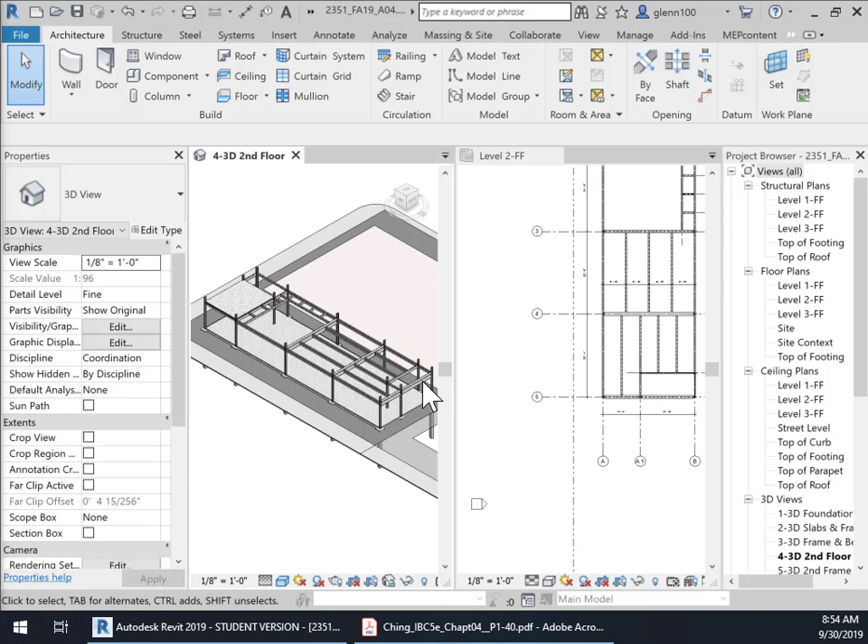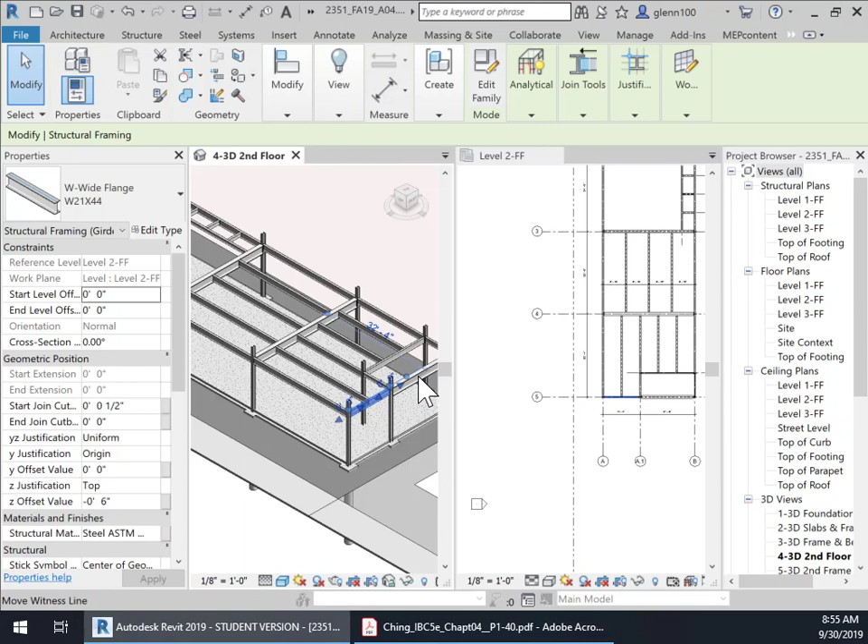In the previous video, on assignment number 4, we finished off the structure by adding beams to the girders and columns. We made some decisions about sizes and stuff. One thing I second-guessed was the size of the beam here at 27 inches—really those spans are so short we could go to like a 21 without any problem. So I probably would, and this is the advantage of having a BIM model: we can sit back and the engineer can come in and evaluate things and very easily make adjustments to the frame, whether it's just changing the size of the elements or not.

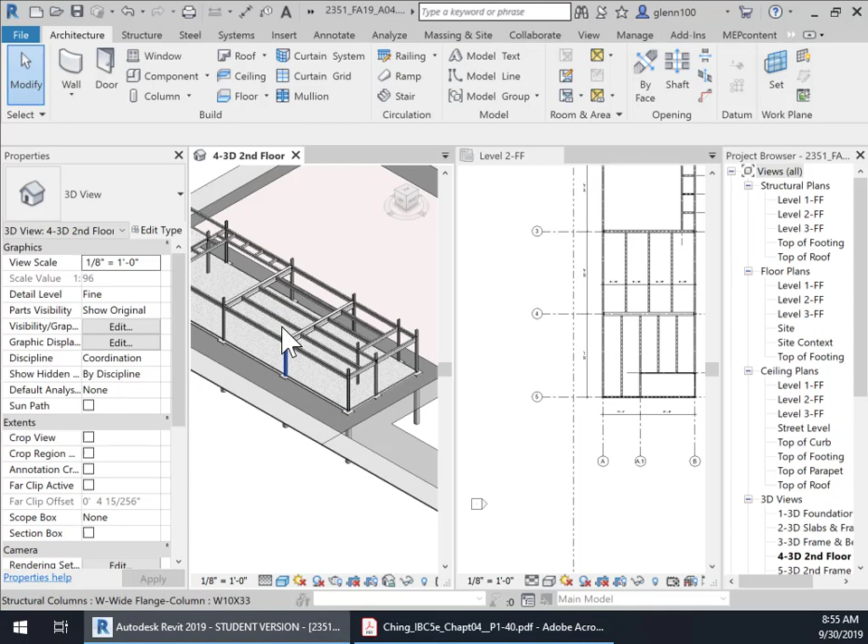But anyway, we're not going to make any more changes. Well, one more thing—I noticed there was a crossing of these two beams right here. They wouldn't do that; one has to end and then start again. Which direction would you go? Probably I would go with the beam that went from girder to girder, the long one.

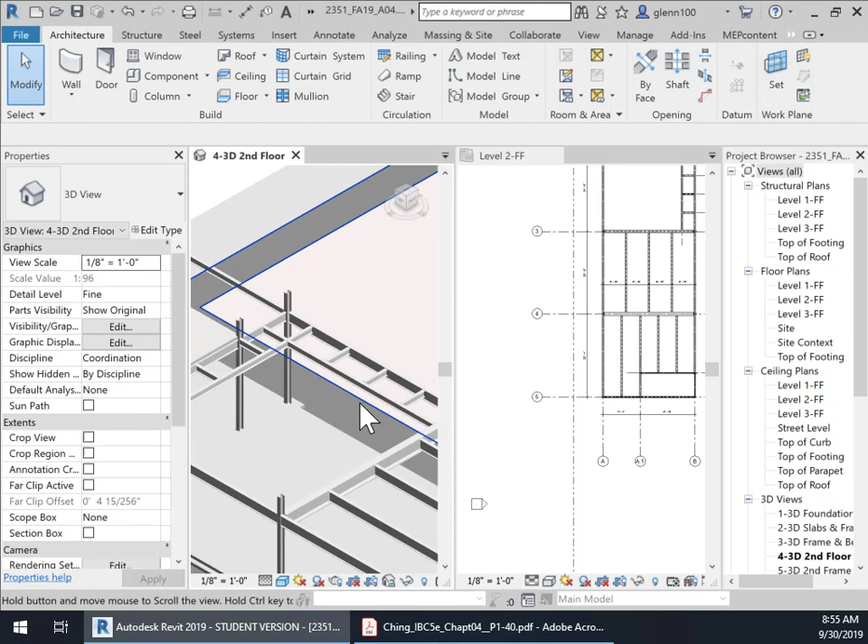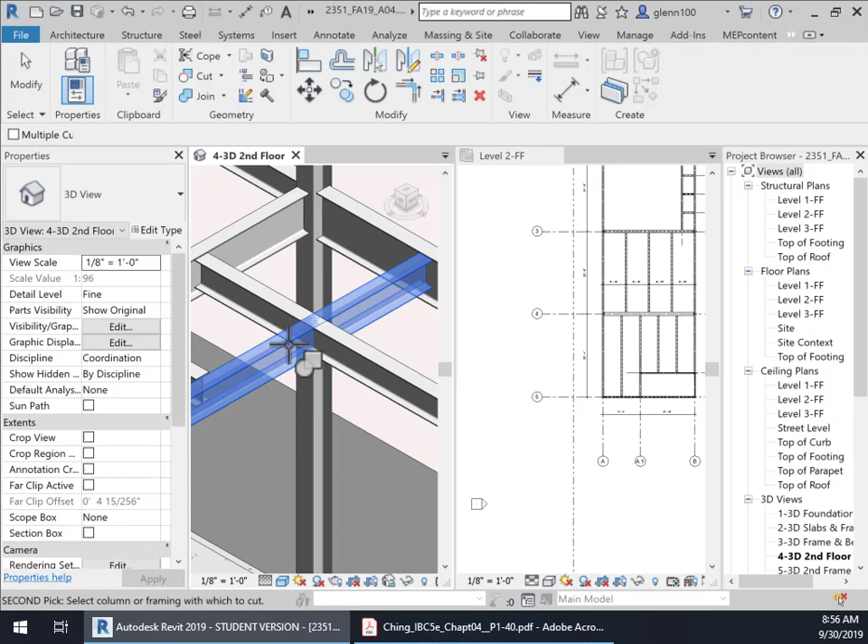And to do that, what we're going to do is use, let's see, modify—let's get the modify menu up—and then I would use coping, cope. Save the project. And then let's see if I can remember: select the one you want to cope and the one you want to keep. Yes, okay.

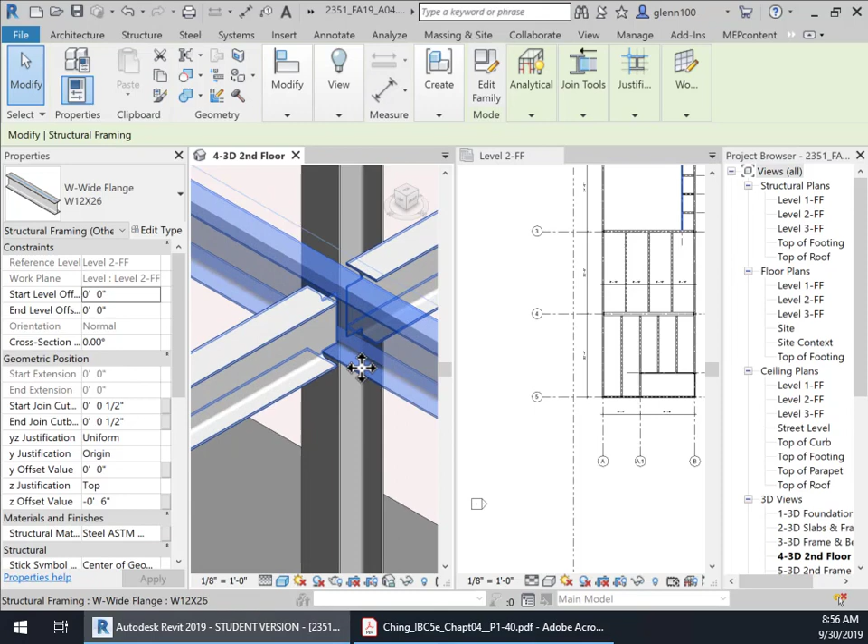So as you can see, it split them there. They should be the same length—I don't know why they're not. They should be 1226. This is 1226, so I don't understand why... oh yeah, it's coping it back. I see, okay. So these are flush, and that's what we want.

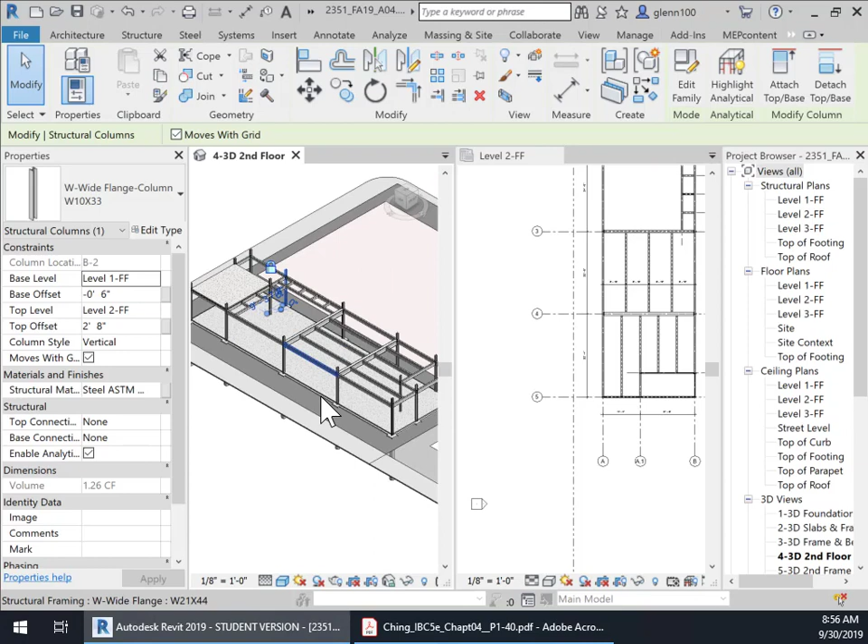They should be at 6 inches below the finished floor of the second floor, and so that's correct. Okay, so now we kind of have our frame done, and what we need to do is add the decking. In our previous work, I decked this area with a metal deck.

If we go back to Ching and my lecture, we talked about metal decking, and so we're going to use a metal decking with a concrete floor slab. There are 3 different types. Form decking, or non-composite decking as it's sometimes called, is where the metal decking is just used as formwork and isn't part of the structure, and wire mesh is added to the concrete. The concrete is really the structure here for the spanning.

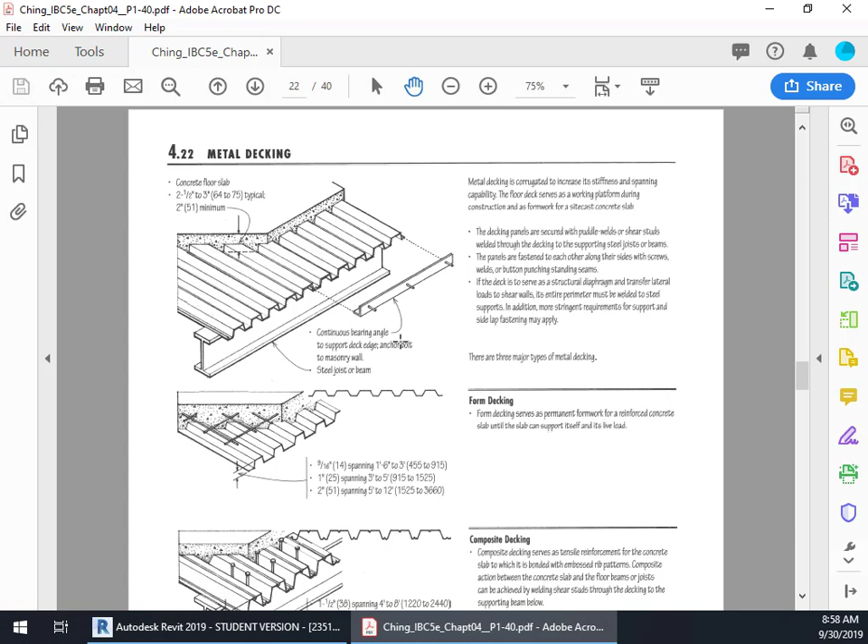And then there's what we call a cellular deck. A cellular deck has a bottom plate to it, as you can see right here, so it's covered on the bottom, creating a cell. That cell can then be used as a conduit for electrical wiring and stuff like that, rather than pulling wire through an actual conduit, because now the deck can service it. So those are the 3 types—we talked about those in the lecture. We're going to use a composite deck, okay?

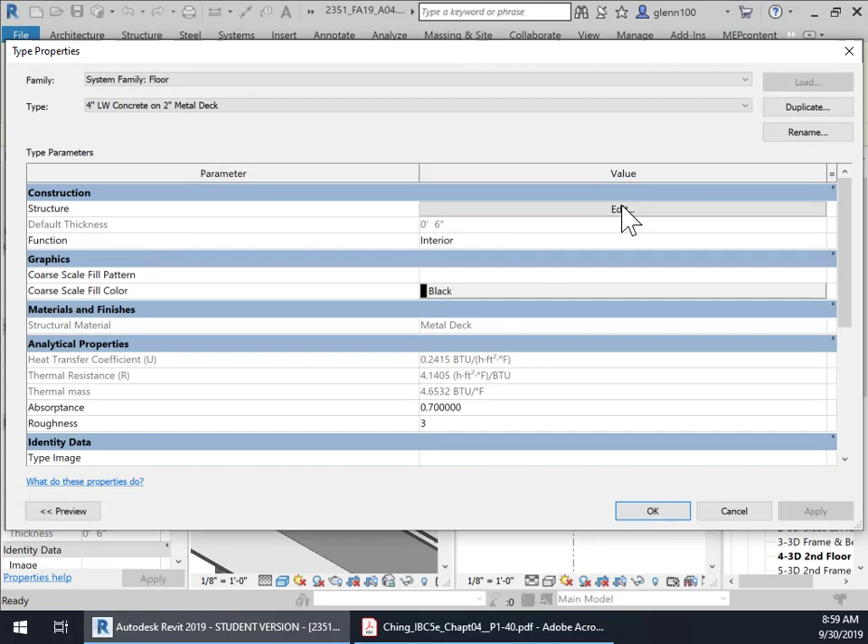And so if you look here, we have a lightweight concrete on a 2-inch metal deck, 4 inches of concrete on a 2-inch metal deck. I'm just going to take a look at this so you can see it. If we go in here and edit it, let's preview this so we can see the image. Okay, so here's our composite deck.

You'll notice if we select structural deck here—structural metal deck—in Revit you choose what that is by its profile. I chose a 2 inch by 6 inch wide: so 6 inches this way, 2 inches in depth, and composite form deck.

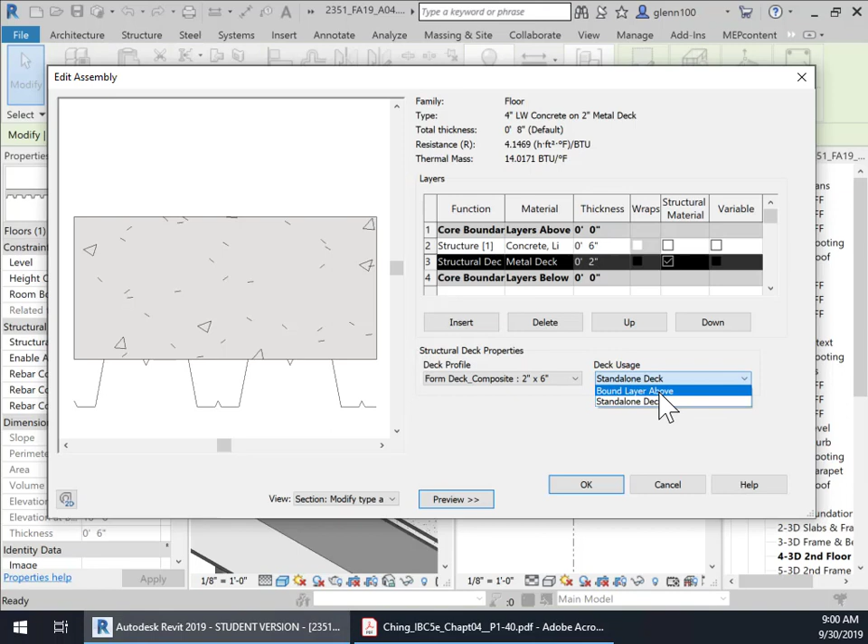If you don't have the profile you want for the decking, you'll have to go add it, and I can show you how to do that in just a few steps. Over here you have deck usage: bound layer above, or standalone deck. If you do standalone deck, the deck stands alone, not incorporated into anything else, and that's what we'll use when we do the roof.

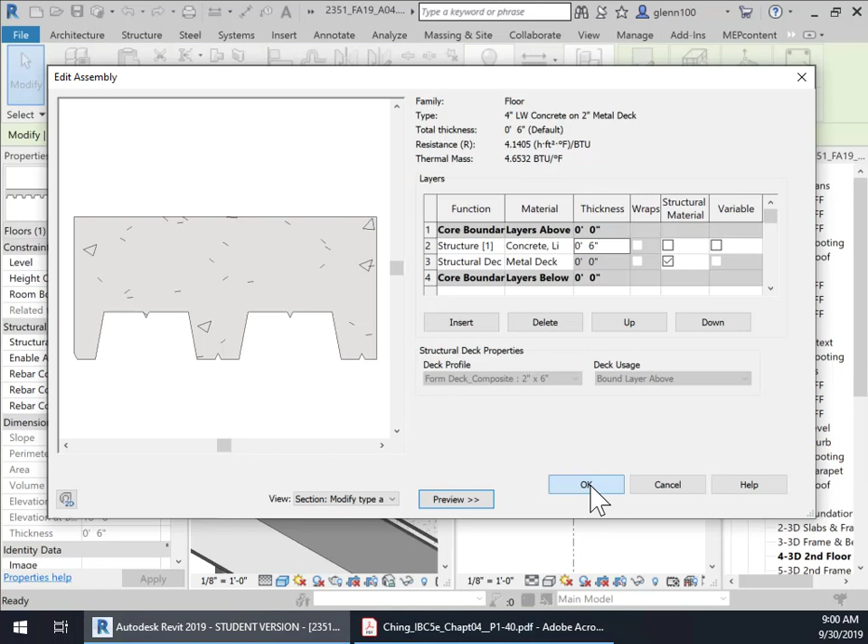So now we have our deck defined. We have 6 inches of total concrete, running from the bottom to the top—4 inches here, plus an additional 2 inches having to do with the deck. So we'll say okay to that, and okay to this.

Now, if I didn't have that profile, I mentioned we'd have to go in and add it. One way to do that is through Insert, Load a Family. Then go down to Profiles—there'll be a folder right there. You'll see metal deck profiles, form deck composite, composite dovetail.

Based on everything I know, Revit really renamed these wrong. A form deck usually refers to only a non-composite deck—that's correct for this one, form deck non-composite. If it's a metal deck and a composite deck, it's normally not referred to as a form deck, but I'm sure there are a lot of exceptions.

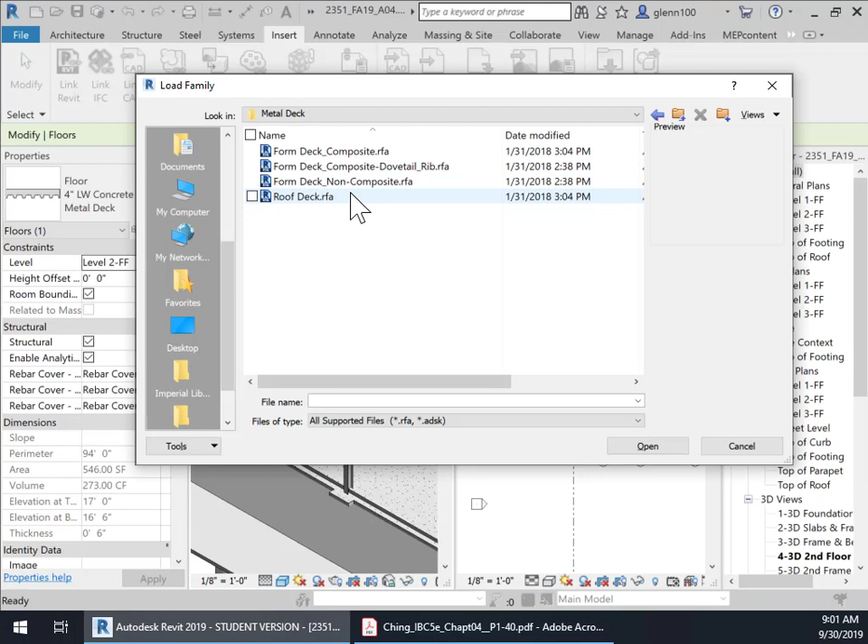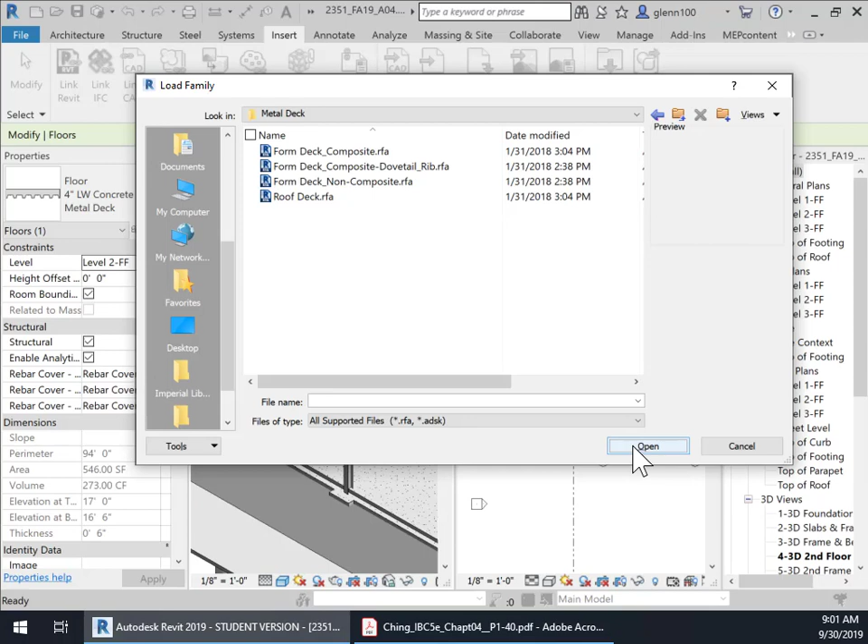And then you can see a roof deck here, which is for when we're not going to put concrete on it on a roof—so that's a quick review of metal decking and how it works. We can add these profiles, and I already added them, and we can go in and edit the type to create our own if we want, but I'm not going to open that right now.

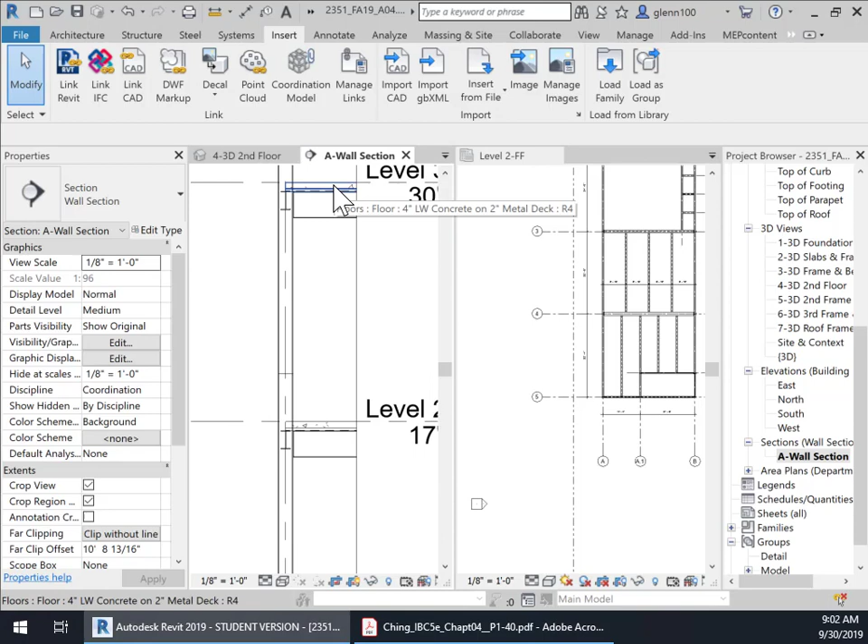So we want to metal deck this now, we're ready to do that. It's going to start at level—if we open up our wall section, we'll see the metal deck here. Actually, let's do the west elevation instead, since we don't have any walls up at this time. Let's go to the west elevation and zoom in here.

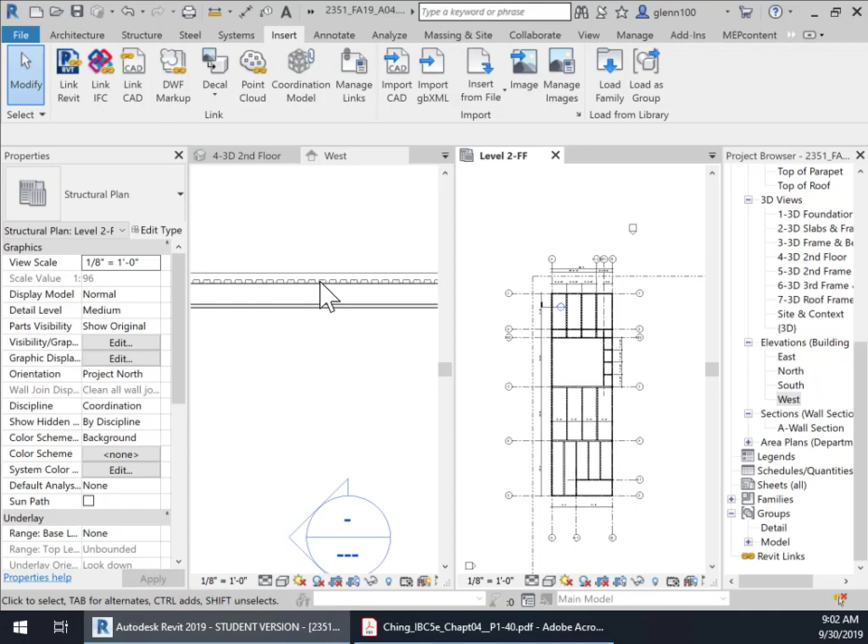In the previous part that I've already done, in this bay up here, you can see I added a deck. This deck is lightweight, on level 2—meaning the top surface is at the level 2 finished floor. That's where we want all the rest of this decking to be: at level 2 finished floor. So we'll zoom in here; we already know this part is done.

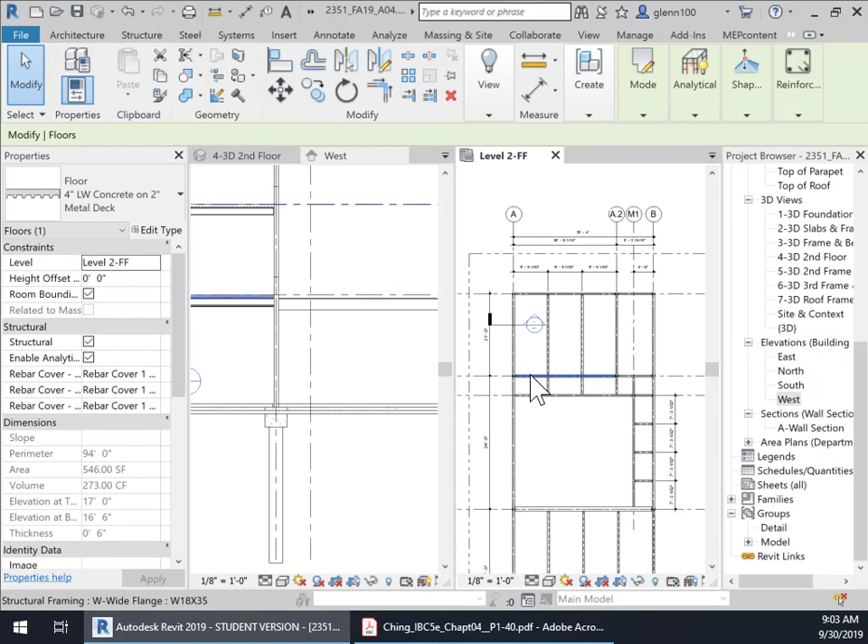I've got it hidden in that view. This is level 2 right here, level 2 structural. The way you can tell if this is structural or a floor plan is these little lines right here—that means it's showing you beams and that kind of stuff. If we open up level 2, notice the plan is blank, more or less.

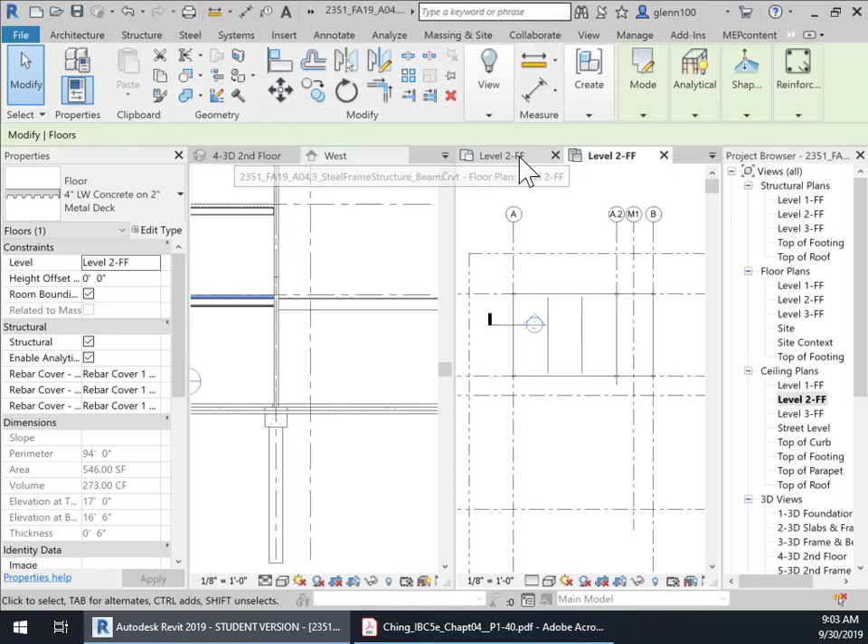And if it's a ceiling, level 2 ceiling, go ahead and open that up too—you'll see it's got a series of hash marks or grid lines. It's real subtle, but that's how you can subtly tell which view you're in. So I'm going to go back to structure because we're just going to deal with structure right now.

So let's put this in—there's a couple of ways to do it, and I'm going to do it the quick and dirty way. If you have the deck going in opposite directions, you need to make sure you have a different piece. So if the decking for this area is running in this direction, and we continue that running the same direction here and here and here, I can do that as just one slab. But if I'm going to change that direction, then I need to make changes to it.

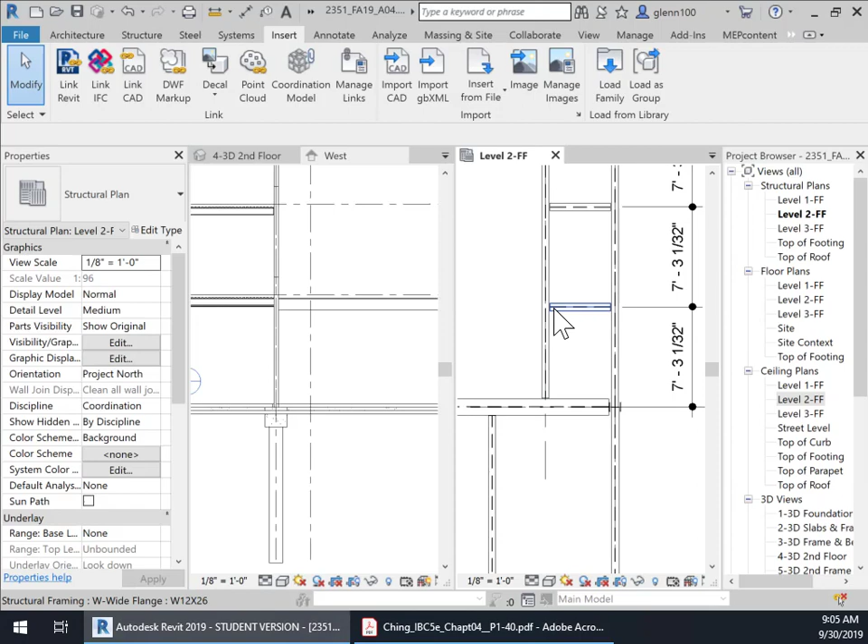Do it in separate pieces. I'm going to assume that we can run the metal decking all in that same direction. This span here is easily spannable, and these members right here really are to help support this beam, not really support the floor. The floor can be supported by this and this to keep this from torquing or from getting a moment in it. So I'm just going to cover it from one end to the other, and then we'll edit. So I'm going to go into structure.

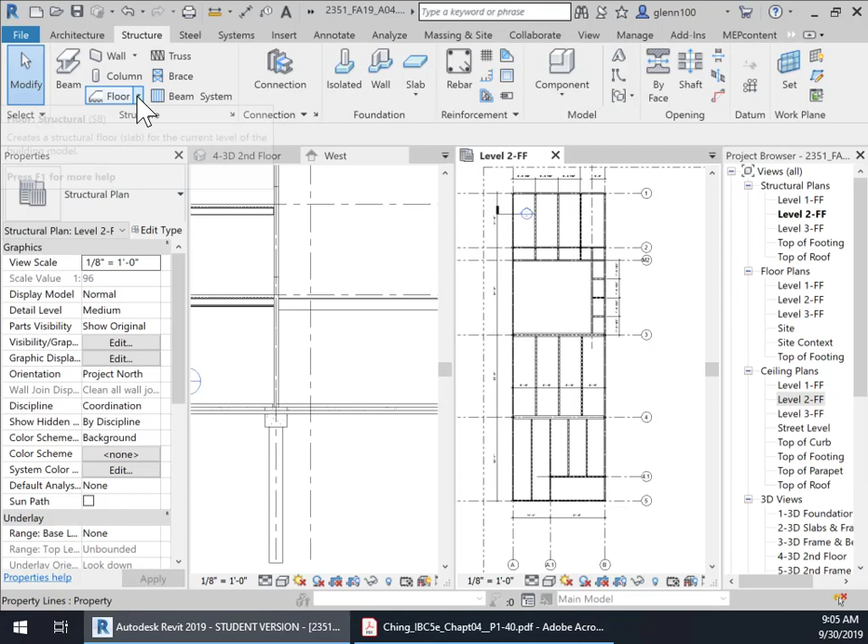I'm going to use a structural floor. And then I'm going to choose the same decking that I used before, this 4-inch concrete on a 2-inch metal deck. Okay, level 2 finished floor. That's correct. That's what I want it to do. Always check that so that you know it's going in the right measure. And then I'm going to use this, and I know it's going to go from right now from here all the way to here.

And then I've got openings that I need to put in there, but I'm going to do that in just a second. Okay, so we'll just go ahead and lock that so that it'll move with those beams if those beams happen to move. And now we have an opening right here. So this needs to have an opening. So I'm just going to choose a line right there, and I'm going to choose that line and this line, the outside edges of those two beams.

Okay, and then this line right there. And then we'll lock it to that outside edge. And then I need to trim this. I need to break this line and trim it. So I'm just going to use the trim command here and trim this one with that one. And then I need another piece, trim this with this, and trim this with this.

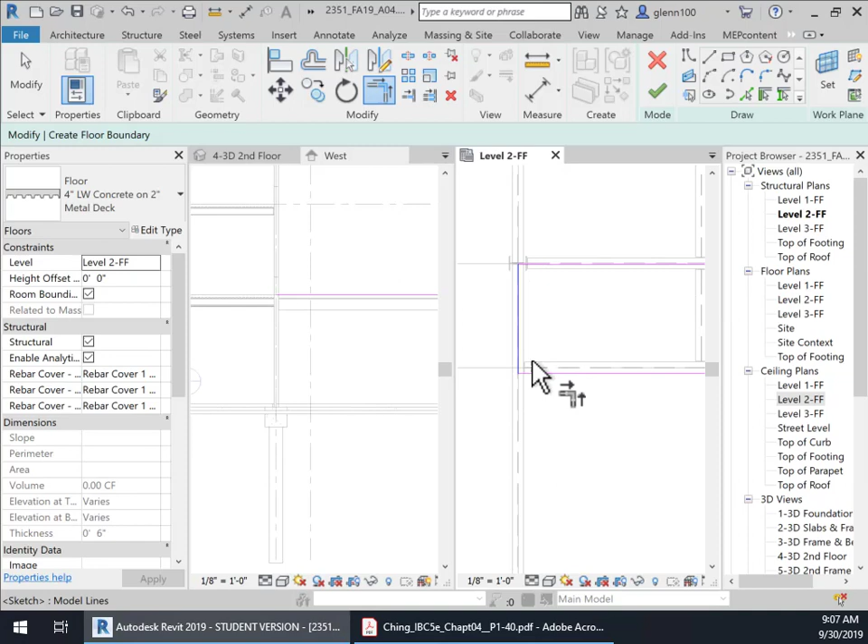Okay, and then I need another line right there. So let's put another line in. And then I need to trim those to make sure that they're closing, because these lines have to be closed. Okay, that should work. And then I'm going to come down here and do the same thing here. Okay, so I'm going to use this line, and we'll just go to this inside edge.

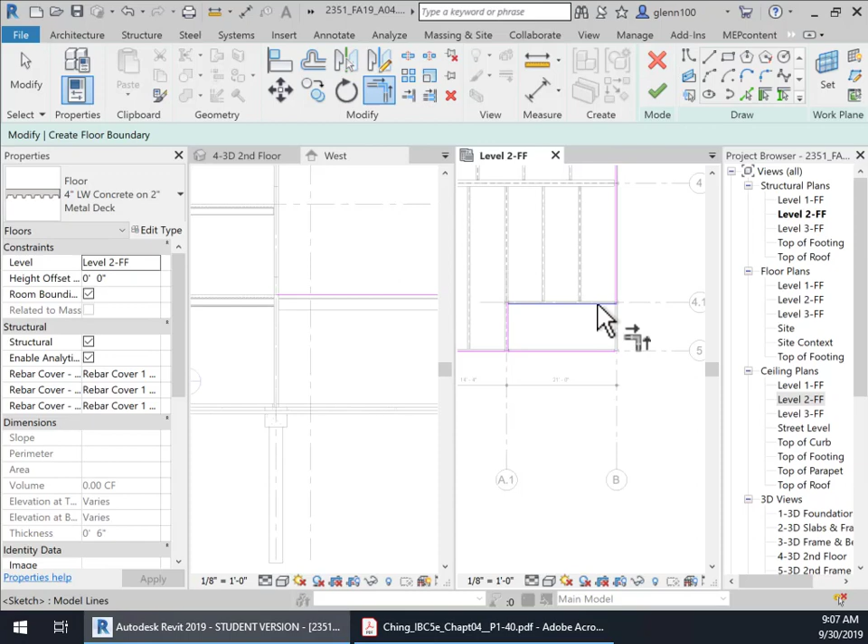And then we should be able to just trim that here, here. And I'm going to go ahead and trim this just in case they're not. So this is open because of this, it's a stairwell, and stairs need to go up and down it. And of course, this is the atrium. Now you can see right here these double lines. They tell you which way the profile is spanning. Okay, so right now the metal deck is spanning this way, and that's the way we want it.

But if we wanted to change that, if we need it spanning in the other direction, what we would do is we would come in, and you can see right up here, span direction. If I click this, then I can choose a line or draw a line. I'm just going to pick a line. So my span direction was this direction, and it was running this way, which it's not. But if it was, then I could choose that. And now the double line shows the deck is spanning this way, which is the wrong way. So I'm going to go back to here and select that.

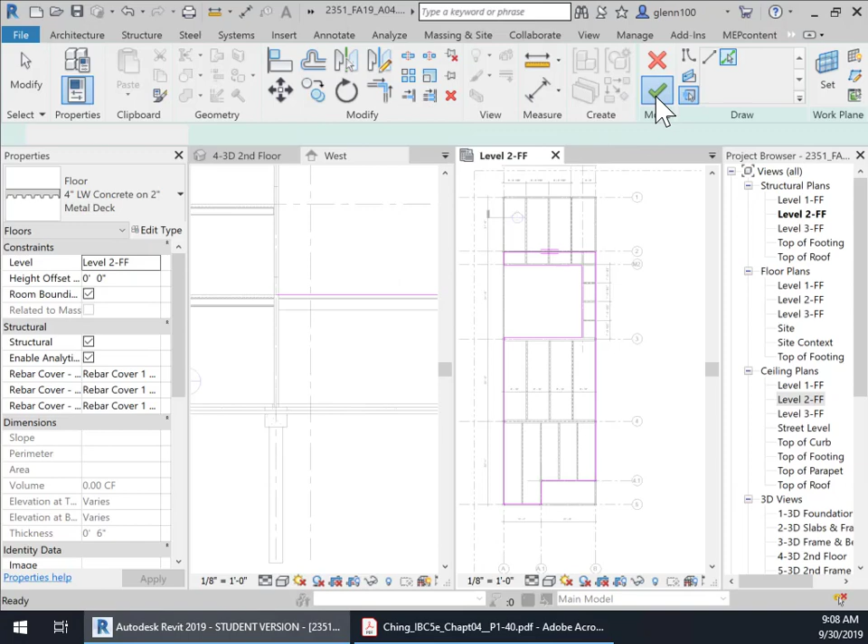And now we're going to finish it off. And when we do, if we look at our elevation right here, we're going to have this wonderful deck that stretches all the way here, has our openings for it, and we now have metal deck. In the next video, I'm going to show you how to quickly copy these floors up onto the second and third floor and replace the decking.